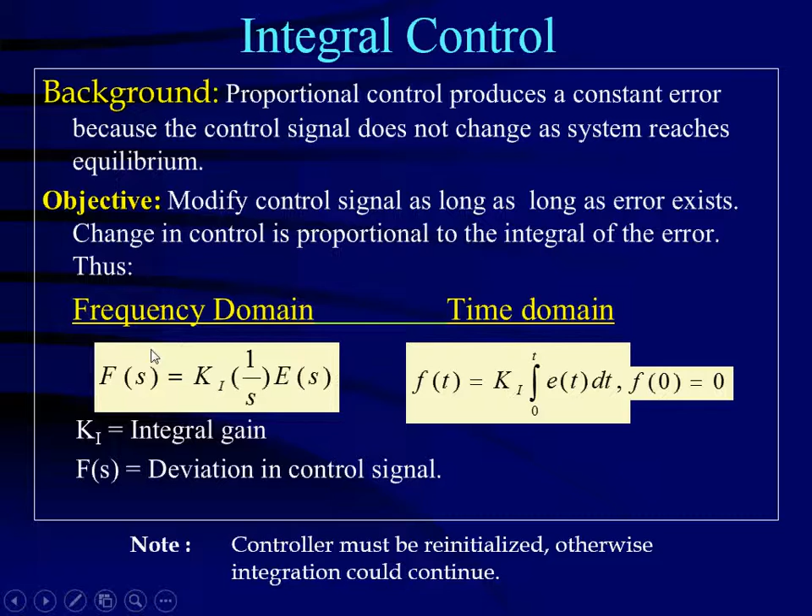In other words, what we are doing is we are imposing on the system this kind of control. So the best thing is to do a little bit of an example here and see what we are saying. Here's the most important part.

This is your system, okay? I think by now, since I introduced last time the different components of the control, you should be able to recognize it very easily. So this is the system. You measure something, and then you're going to compare with some set value that you have.

If the two signals are the same, the error is 0. If the two signals are different, then you have an error. So we feed this error here, right here, and we put this integral control on that error.

So the integral of the error is what is fed back, multiplied by the gain, what is fed back to the system. What is this here? Still, you might have a bit of an issue with that and be wondering, what is that?

This is the disturbance. In other words, this is what causes the system to get out of control. This is similar to if you are cooking your turkey and you have it set up to be at 375 degrees, somebody opens the door of the oven and it's no longer 375. Okay, so...

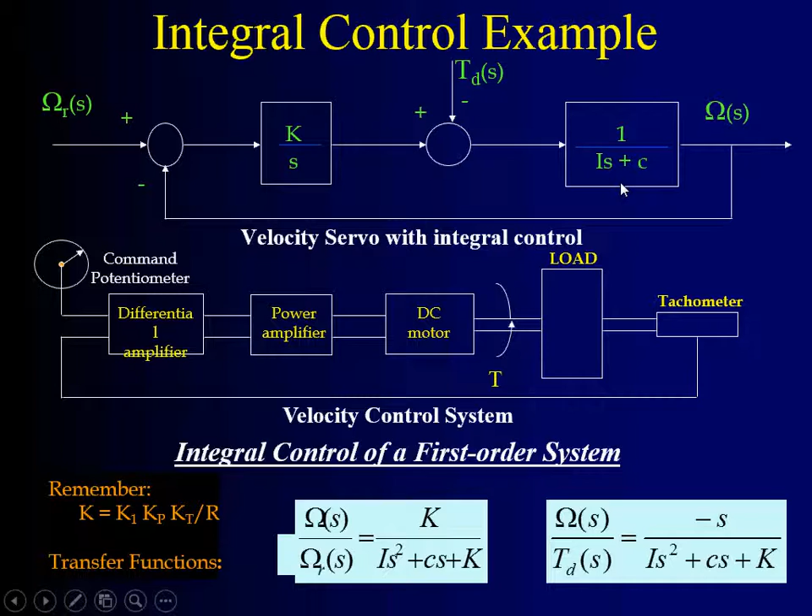So the idea here is, how would we find this k here? This is an example of a first order system, as you can see, s is to the first power. But if you have a second order system, for example, the transfer function is like this.

You have the motor in here, a DC motor. You have a disturbance torque in here, and then this is where you measure it. You feed back to this amplifier, compare it to the command, to the desired value, and there you have your control system. So this whole thing that you see here in words and in physical components is expressed over here in terms of the integral control plus your system.

And here, as an example, are the two transfer functions. So you could see why we spend quite a bit of time obtaining the transfer functions. Because at this point, where we are designing the controls, either you are given the transfer function, or you have to find out what it is. And to do that, you are well equipped with tools on how to find the transfer function. But we are basically working with this.

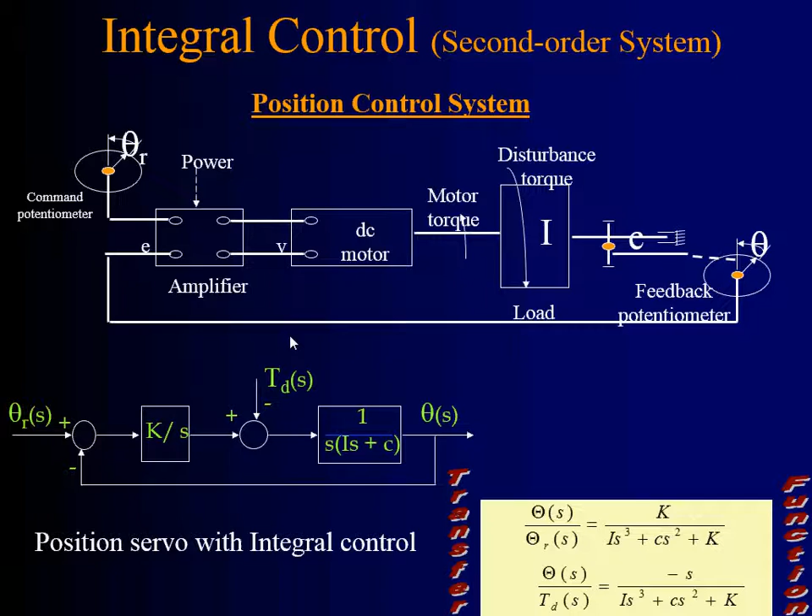In fact, some books don't have much in terms of the background or the derivations from the system, but they start with the state space representation or with the transfer functions. And so from now on, that's where we need to concentrate our attention.

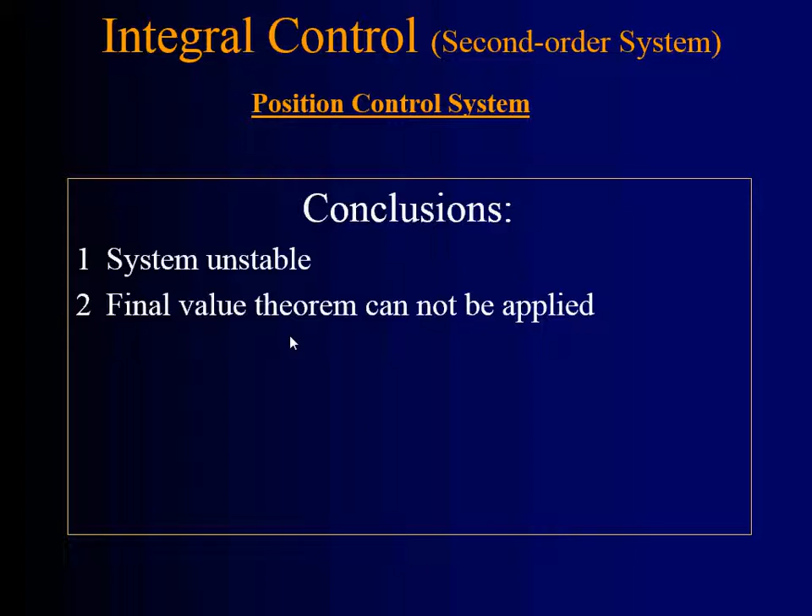In the case of integral control, the system oscillates, creating instability. So you fix the error, but the system oscillates. There are mathematical problems also with integral control: the final value theorem cannot be applied. And integral control improves the steady state, but it produces an unstable system. So it has an undesirable effect also.

It's just like everything in excess is bad, let me put it that way. So you might have a little bit of integral control, enough to correct the error that you need. But if you put too much of it, the system will go unstable. Also, it slows down the system - it corrects the error, but it will degrade the transient response, which means the system is not going to react very quickly. In fact, it becomes slower and oscillates. So it doesn't reach a steady state in one scoop like proportional control, but this would oscillate.

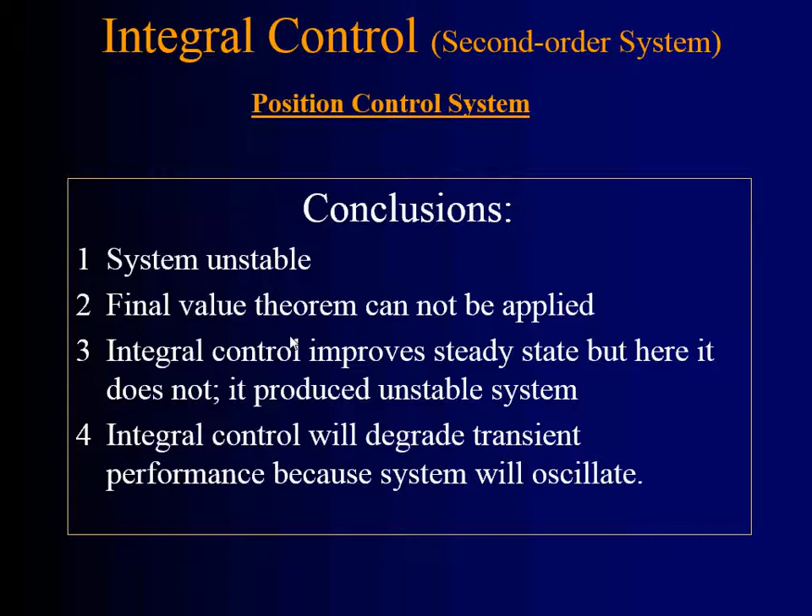Okay, let's go to the next type of control: derivative control. The background is, integral control produces a control signal that corrects the error, but results in an unstable system.

Now we would like to make a controller that will react to the derivative of the error, with the derivative control law. This is the equivalent of inducing damping in your system. So you begin to see that all three complement each other: proportional control is fast, integral control corrects the error, but if you put too much, the system oscillates. But it's like an antidote - to correct that, you put derivative control. Derivative control is damping in the system, so this one would actually introduce elements that dissipate energy.

So the derivative control law is: the gain for derivative control, remember d/dt, so it's the derivative times the error. So this is the derivative control law. Look at the bottom now - your control system, if you have a PD controller, is going to look like this equation right here. It has the proportional constant, the derivative constant times s, and then times the error. You see, that's the control law.

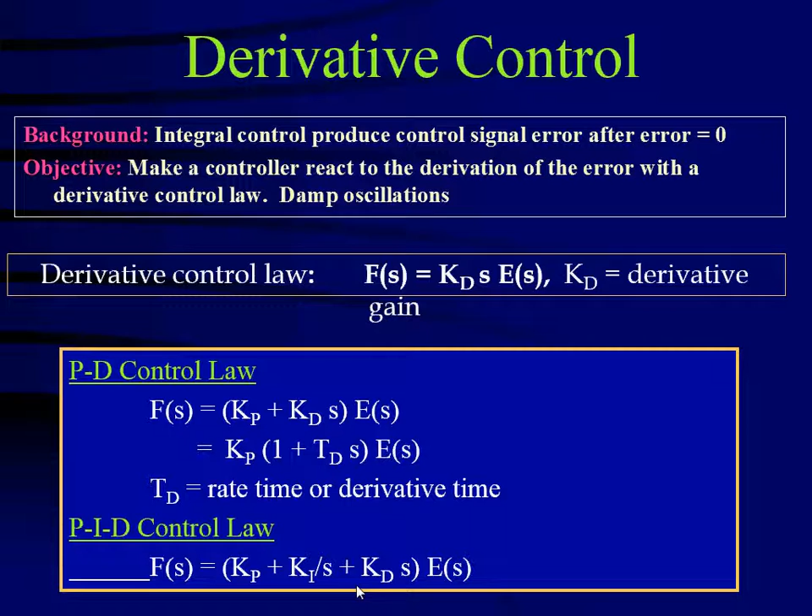So by now we are seeing that with these three types of controls, it's as if you have several ingredients to produce a certain result. How much of it you should put, or maybe you should not have one of those in the system. That's the question. For example, if you have a proportional derivative control for a second order system, you have here

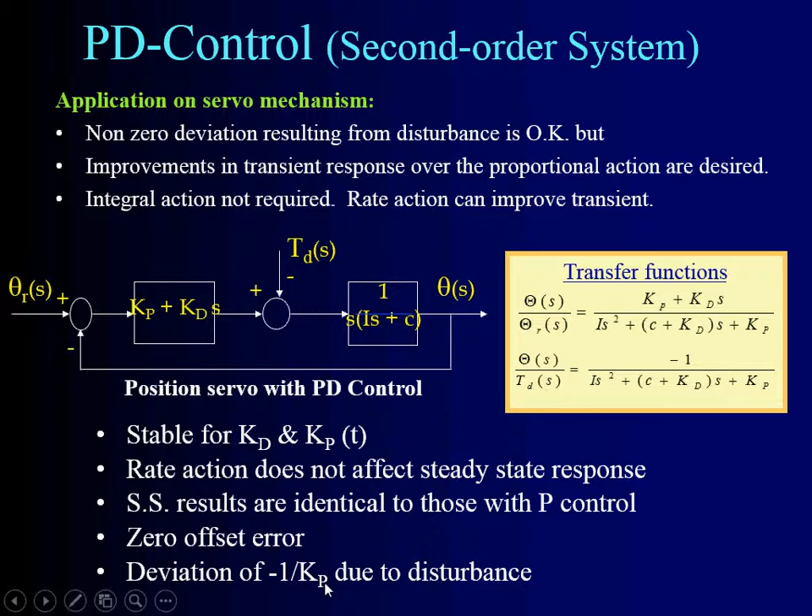If you have this control, PI control now, the one that we were just in is called PD control. This one is PI control. Okay, here's the background for this.

Proportional control introduces steady state error. Integral control corrected the steady state error but degraded the transient response. Objective: can we combine the instantaneous response characteristics of proportional control with the zero error steady state characteristic of integral control? If you do that, you will have this, see?

And you can put it in different forms, this control law. So you could do the expression of this in this form or this form using these other variables, like t sub I, which is the reset time.

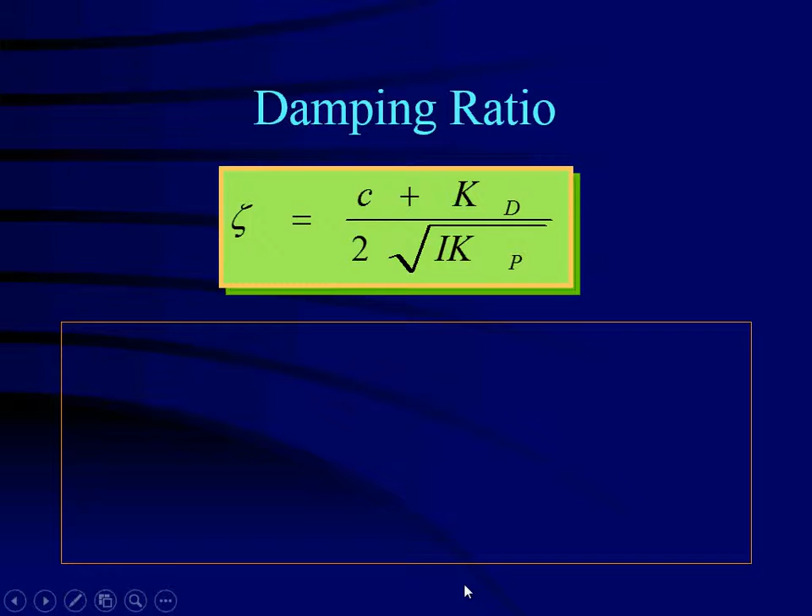Integral action resets the controller in the presence of a disturbance. 1 over t sub I is the frequency with which the integral action repeats the proportional correction. Integral action will not react instantaneously to a zero error, but continues to correct. So this is the PI controller.

Now, the damping ratio is an interesting concept because you could have a system that has the poles on the left hand side, and if you get off of the real axis, then you have damping. And this is the way we express the damping ratio.

And in terms also of the proportional and derivative gains. So proportional gain can be large to reduce steady state deviation. Translating in other words, if you have a big error, you need big control. Derivative control can be used to achieve an acceptable damping ratio, meaning you introduce dissipation on the system. And then finally, KD helps stabilize the system by adding damping.

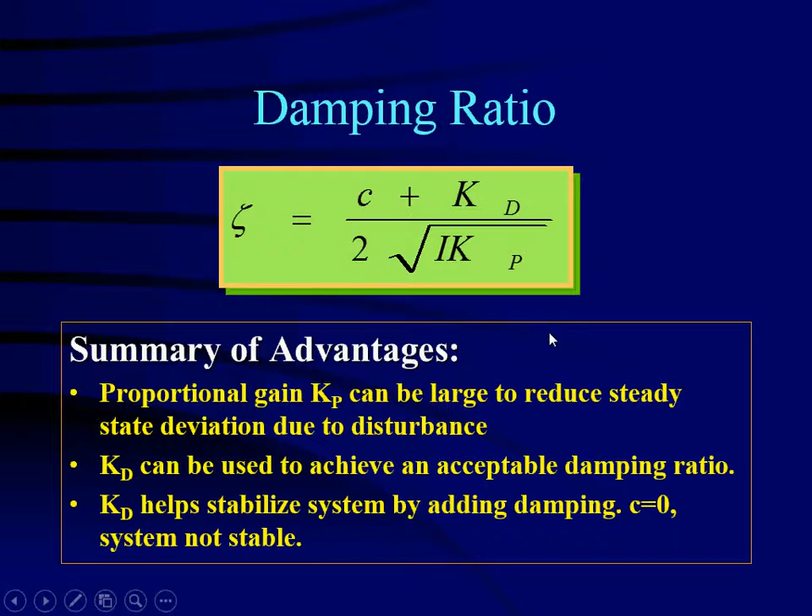Now here you have an equivalent derivative action. So you could have different combinations of this PI PD controller. In this case, you have this tachometer that measures the angular velocity of this load, and then this is used to produce differentiation.

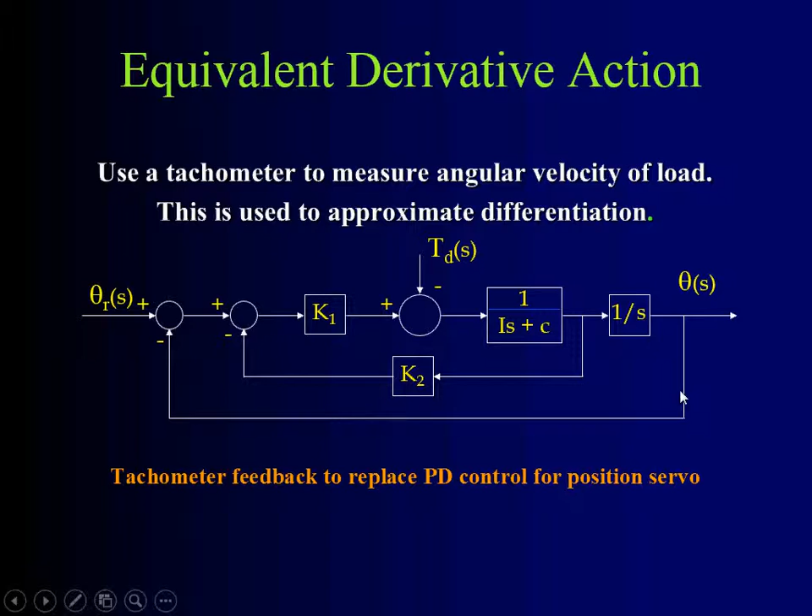So this is an equivalent circuit as a whole to a PD controller. If we look at the transfer function here for this, the numerator has no dynamics, so the system is slower

than one with pure PD control. K1 and 2 can be chosen to give the desired damping ratio and the steady state deviation. The control system is stable if I, C, and K are positive. So you have this kind of a response if you put a unit step input.

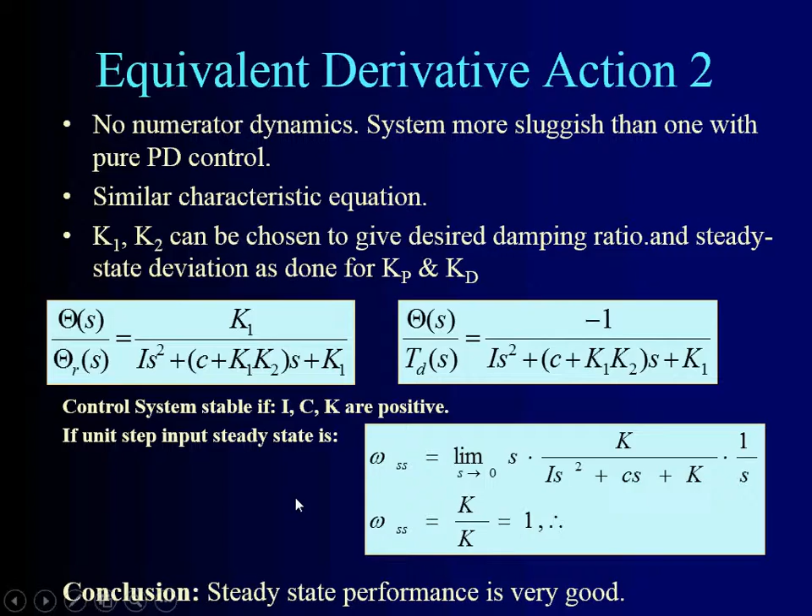Here you have a PI controller. So we're looking at different kinds of examples. This is a PI controller. What are the advantages or conclusions of using something like this? Because you can see this is the proportional gain, this is the integral gain, right?

Conclusion: steady, stable for positive values of Kp. Response to the step input equals a steady state. Offset error 0. Response to unit step disturbance also has 0 error. Kp allows the damping ratio to be selected without fixing values of the dominant time constant.

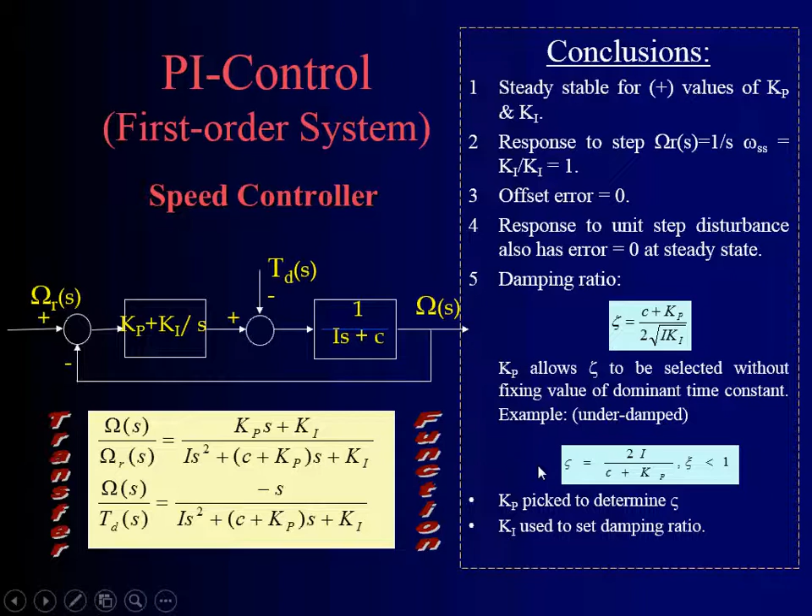And then, these are just to indicate what the reaction is to the different values of the time constant. And of course here it says you pick the proportional and integral controls.

Here we have a second order system, for example. If you do different proportional control for a second order system, you can see that you just don't go and throw the proportional or integral in there. It depends what the original transfer function is. But what we are seeing here is we're trying with different transfer functions. For example, in this case...

Steady state performance is good if Kp and Ki are set appropriately. Problem: for a small c, Kp must be large in order to satisfy c*Kp minus I*Ki being bigger than 0. So the conclusion here is it's hard to implement. If Kp is much bigger than 0, the time constant may not be satisfactory.

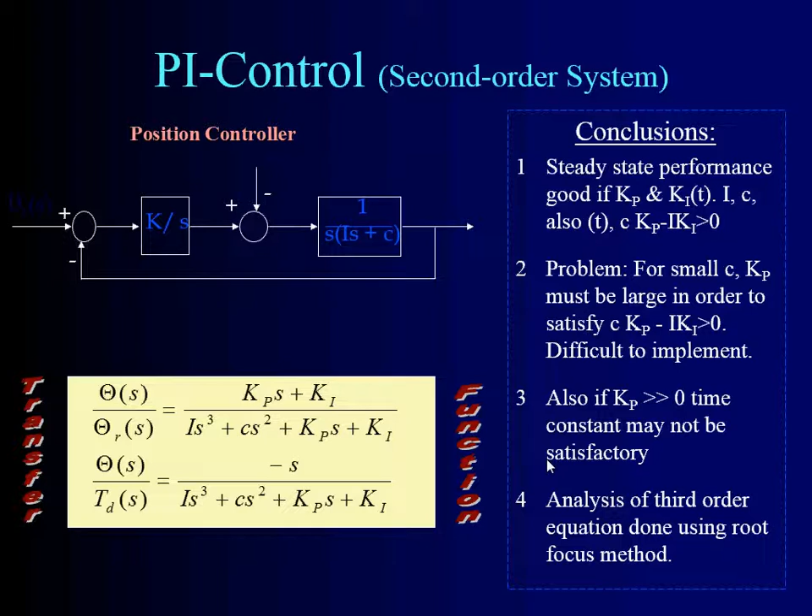So you get the trade-offs in there, and what I'm outlining are the conclusions and observations. The analysis of third order equations is done with the Root-Locus method for this.

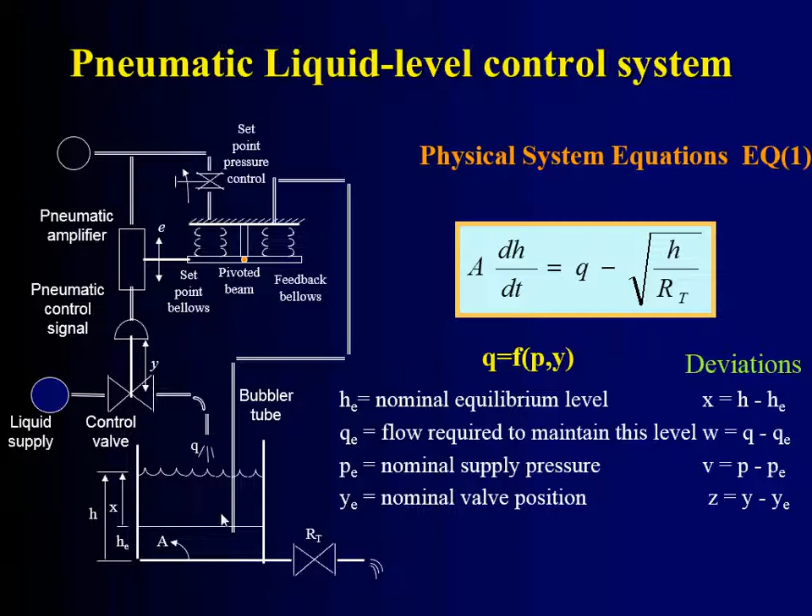If the water is rising, this pivoted beam does the opposite. So the entire system here is designed to control this valve that either gives water to the system or closes the valve. So this is another example of application of this.

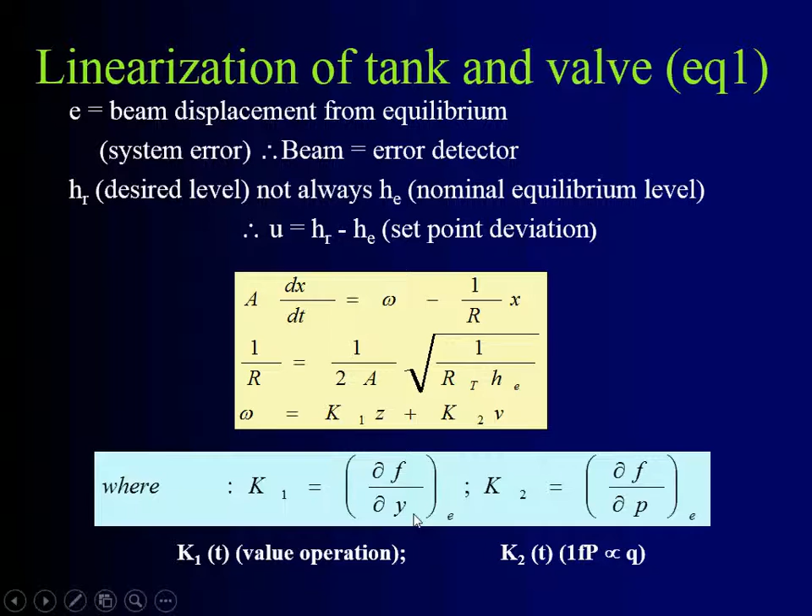I'll show you the way the equations are for this particular valve. This is done with a different method, the block diagram method. And so you derive this - this is the control differential equation of the system. It's a first order system, and then you have K1 dF/dy and K2 dF/dP.

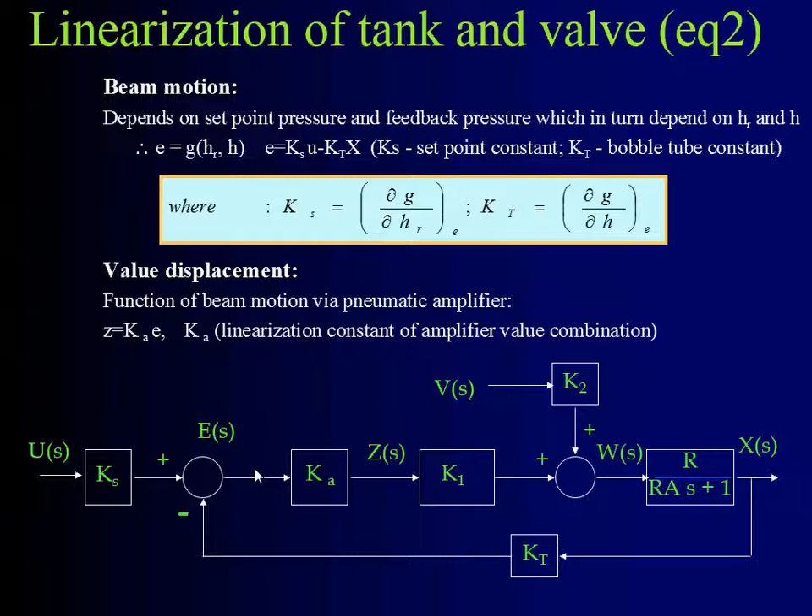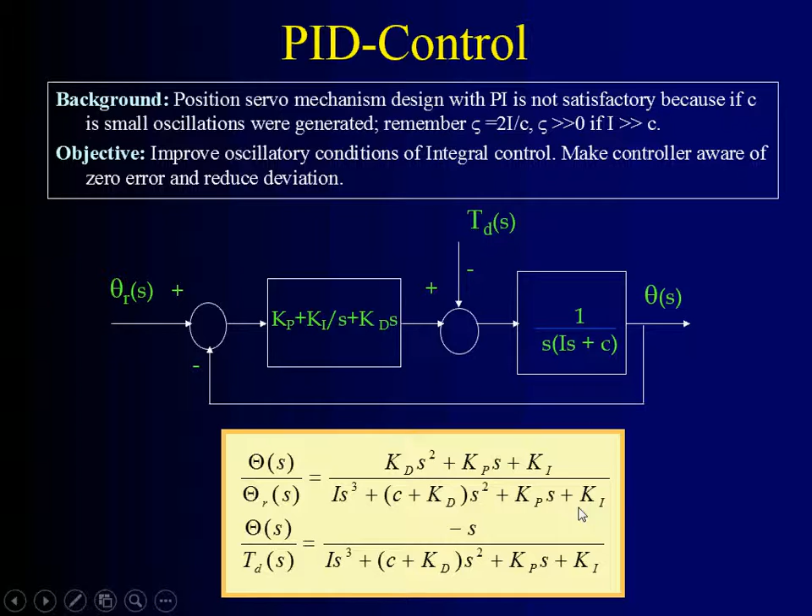So this would be the setup on how you build a PID controller onto your system. You can see this has a component that's integrated, one that is the derivative, and the proportional control. The combination of these is what you have down here as the transfer function. So any combination of these controllers can be made depending on what the system requires.

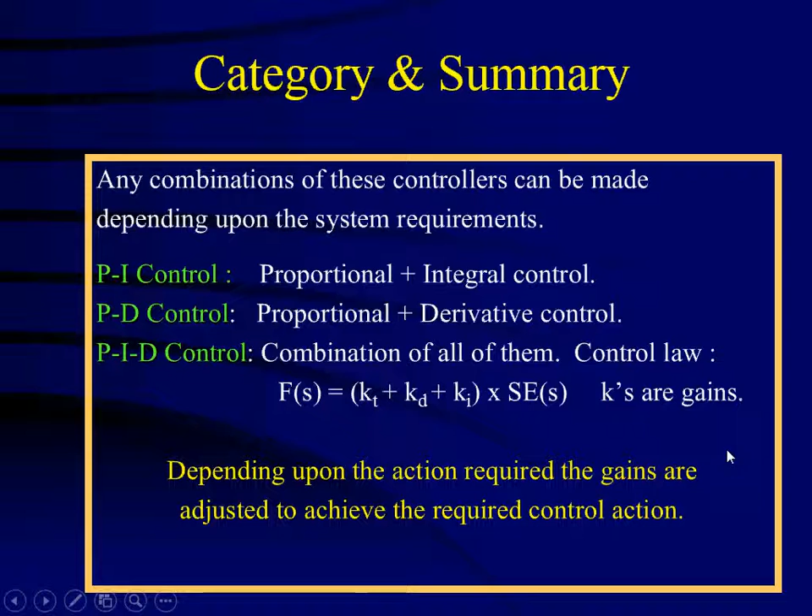PI control is proportional plus integral control. PD is proportional plus derivative control. Or you can have a PID controller, which is a combination of all three. The control law is over here. So depending upon the action required, the gains will have to be adjusted to the required control. That is the conclusion of this presentation on the three different kinds of controllers that we can have.